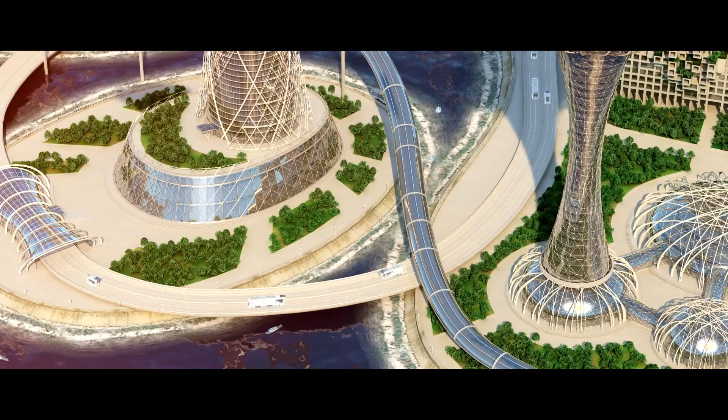To do big things, to do good things, to have a vision. This always drives me in my life. With the LEA technology, we now can contribute to a sustainable global ecosystem as well as to an enhanced telecommunication via space.

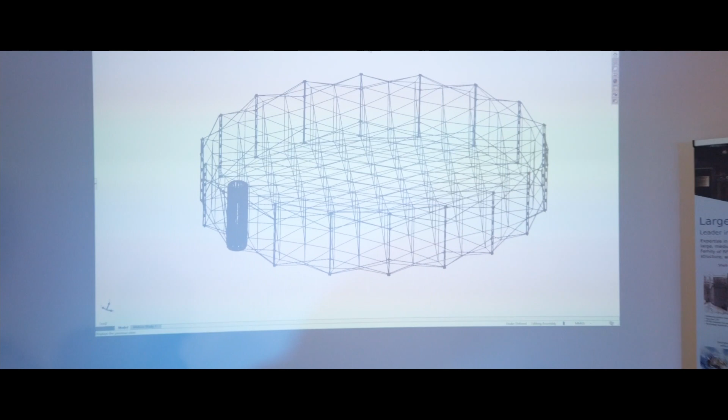Big things can only be achieved when you can count on a team which follows you, which believes in the goals, not only at your own company, but also at the partners, at the subcontractors, all the way long, and even during the Corona restrictions.

LEA is another proof that the ESA programs and the programs of the European Commission can create so many fantastic synergies. The trust of both institutions in us, in the LEA team, this boosts us now into the World League.

80 people are working for the LEA companies, for all our LDRS projects currently, at all their different positions. But all are fascinated on what they are doing. This is the story, and this makes me happy.

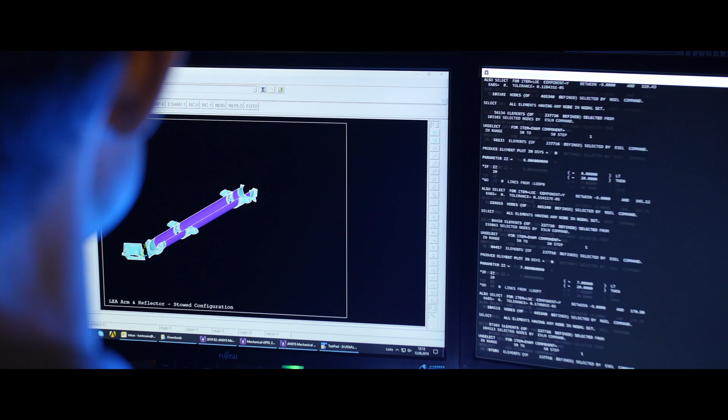The LEA X5 development marks a significant milestone in the development of a European-sourced large deployable reflector subsystem. Such a subsystem is composed not only of the arm and the reflector, but also of a number of other elements, being it the hold down and release mechanisms, being it the electronics with the harness to control the system during the deployment, or the thermal insulation to protect the hardware from the harsh environment in space, just to mention a few of them.

But all of these elements are brought together by HPS to form a qualified large deployable reflector subsystem, LEA.

I'm involved in the technology development of large deployable structures since the beginning of my professional life. In 2010 I started as a research assistant at the Technical University of Munich, and in 2016 I joined HPS, becoming the lead engineer for large deployable structures, including LEA X5. I'm really proud to be part of the team, having achieved a major milestone with qualifying the LEA X5 subsystem.

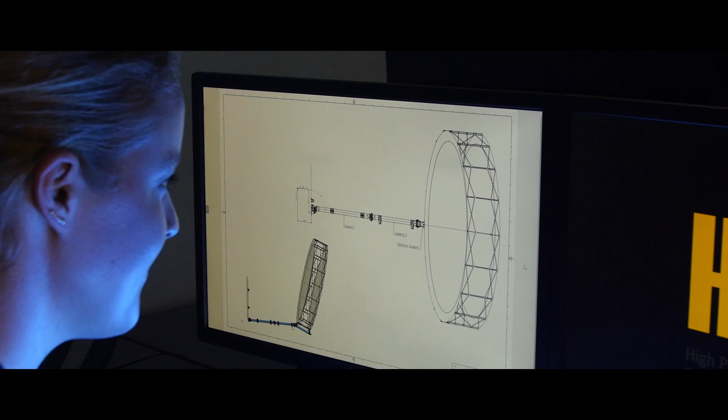Building on the LEA X5 success, I am already working as the project manager for the large deployable reflector subsystem on the follow-on project CIMR. We have a very challenging schedule, with the next milestone being successful preliminary design review already next summer.

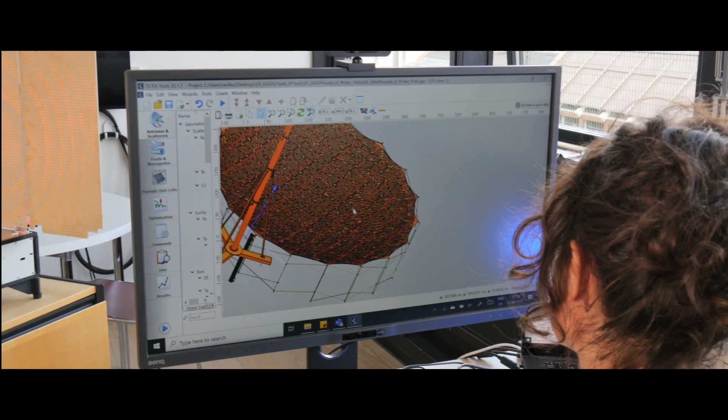TICRA has 50 years of experience in modeling reflector antennas, and our software GRASP is used by all players in the world doing large deployable reflectors. So for us it was a must, but also a great honor to be part of the LEA project and give our expertise to such an important development.

So it was our responsibility in the end to tell if the LEA antenna performed as expected. So it was a huge responsibility. I have passion for space and I'm a European citizen, so for me, working with an antenna that could be launched in space has been a dream.

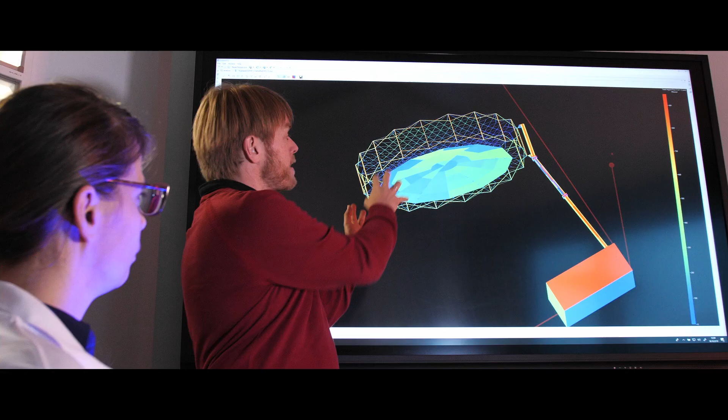After more than 20 years of extremely reliable software developments for space debris simulations and onboard software developments, ETAMAX now proudly contributes to the safety and reliability of LEA in space.

RUAG is a reliable and dependable supplier of deployment systems, and we as a company stand for 100% mission success. With the LEA project, the technical and programmatic foundations were laid.

Examples are the way of working, the development of the deployment subsystems or materials and processes. So now we have all the solutions and concepts ready to turn this heritage into flight hardware very quickly and efficiently.

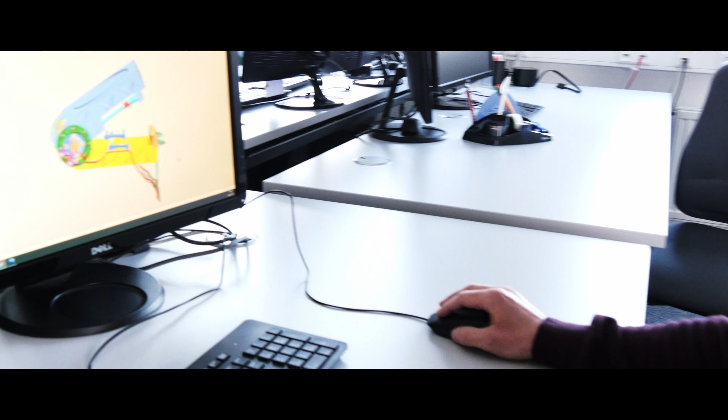LEA started with an idea, and right now we're developing the real flight hardware, and it's quite exciting for me to be part of this complete development cycle and to be part of this straightforward team.

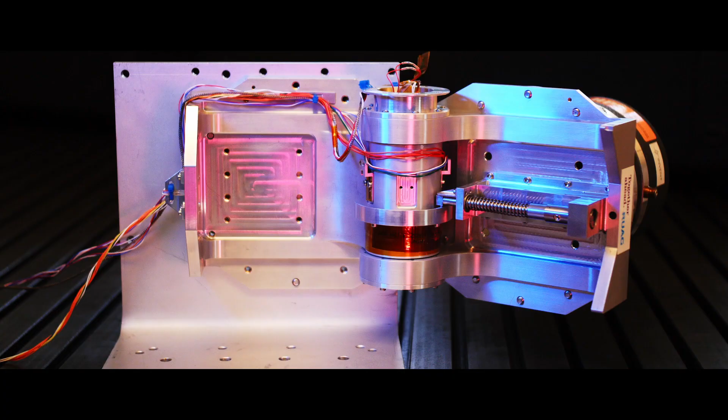On the other hand, we're part of the Sentinel program. At the end of the day, our hinge has to deploy a 60 kilogram mass at the end of an 8-meter arm. So we are building a system which helps us to better understand what's going on Earth, so to understand climate change.

This project opens up completely new business opportunities, not only for the European space industry, but also for our company, von Hörner & Sulger. It's a huge step for Europeans' technological non-dependence.

As successfully shown over the last 50 years of our company, von Hörner & Sulger, we use our highly competent and creative team to develop the best solution. The overarching collaboration of several SMEs, bundling their profound expertise, is extraordinary and unique, enabling a new dimension of creativity.

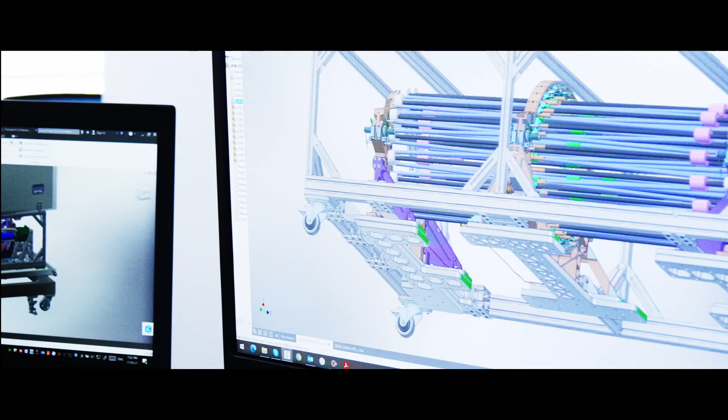In all HPS Romania activities, we have collaborations with other Romanian entities, companies and institutes, and we are ensuring them access to the European space market. And I have to say that this is an opportunity for all professionals here in Romania, because we have many highly qualified people able to deliver great quality products at competitive prices.

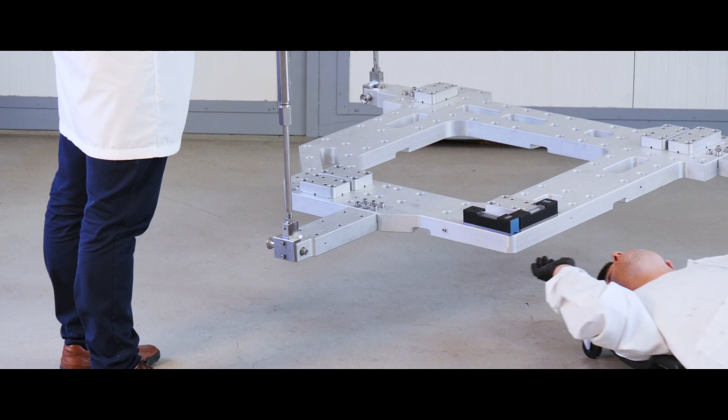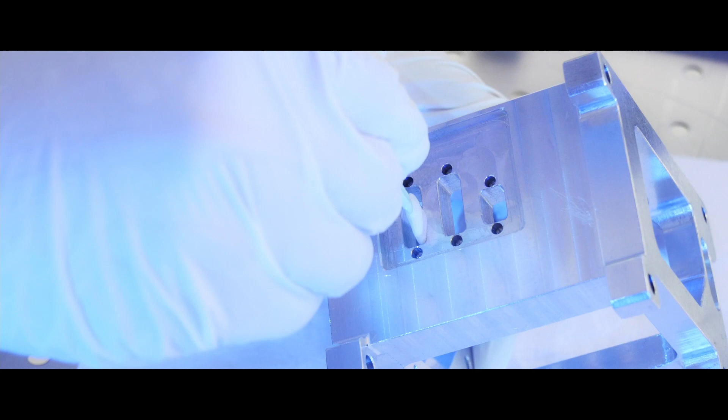HPS Romania became an important supplier of high precision MGSE assemblies and metallic parts, and managed to provide fully qualified products for various important missions.

And to sum up, we are enthusiastically looking forward to the future and to see our contribution on board future space missions.

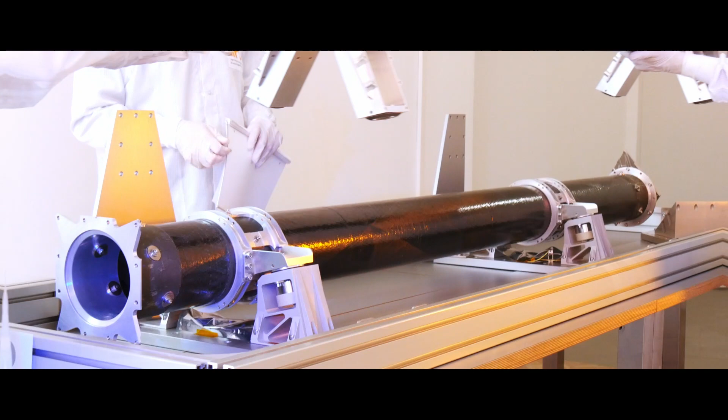Unique from my point of view was the multidisciplinary character of the LEA project. It was the first time I saw so many different specialists—mechanical, thermal, electrical and RF engineers—teaming up and working together, synchronizing and guiding their work brought us where we are now.

Deployment accuracy, repeatability, RF performance, high structural stiffness while keeping the mass low were the major challenges that we had to approach.

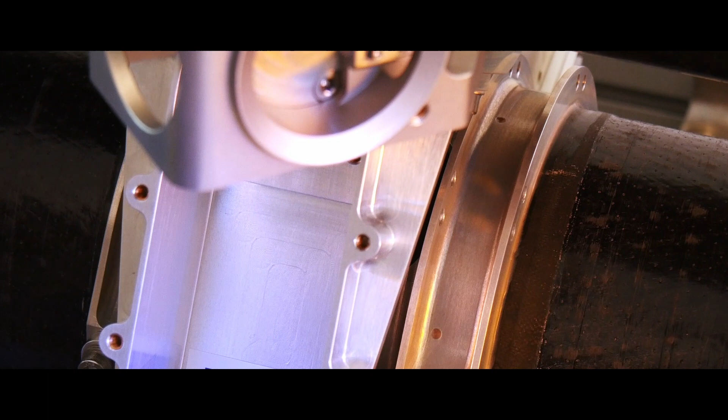For a high technology space project, it is of utmost importance to have a stringent product and quality assurance process set up and implemented. These processes need to follow the highest standards as defined by the ECSS and are applied by the European Space Agency for all their space projects.

Since INEGI has been committed to European space business for more than 15 years, it represents now more than 10% of our turnover and is an area we define as a key strategic development area for INEGI, also for the country. So it's important for Portugal to be more present in the space industry. Within this strong and committed team, one special word for HPS Germany, that we've been working with since 2007, so it's been a long-term partnership and it's been quite profitable for both organizations.

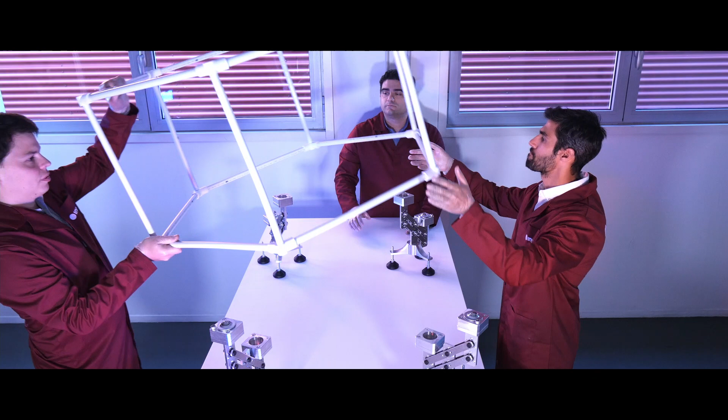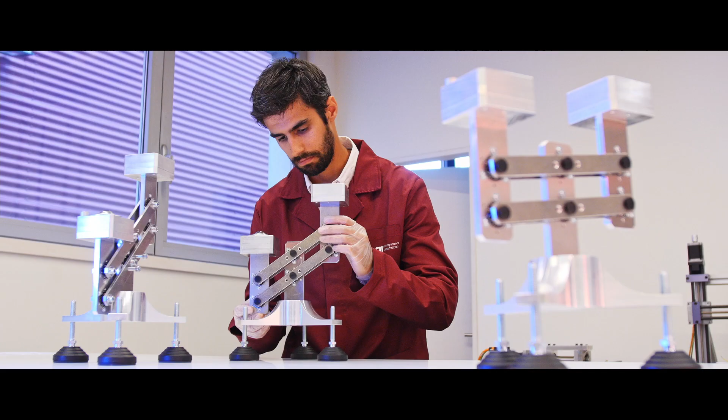My personal motivation to be part of this project is that it is a life opportunity to be part of European space history, and I really feel honored and lucky that I am part of such a great team.

Large antenna technology is really important. Our world is growing, and with this growth, it is critical that we start monitoring more closely how we are impacting the negative outcomes of this growth. We really need to observe our world.

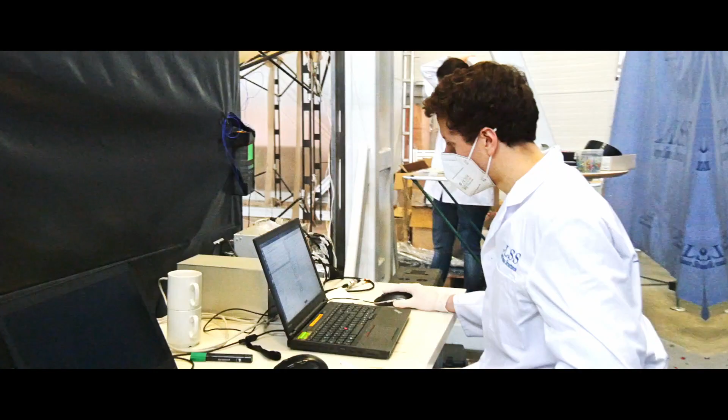Time framing during Corona restrictions was really not so easy, but we still managed to go with home offices mixed up with the office work, with the MAIT hall and workshop work, so that at the end it worked.

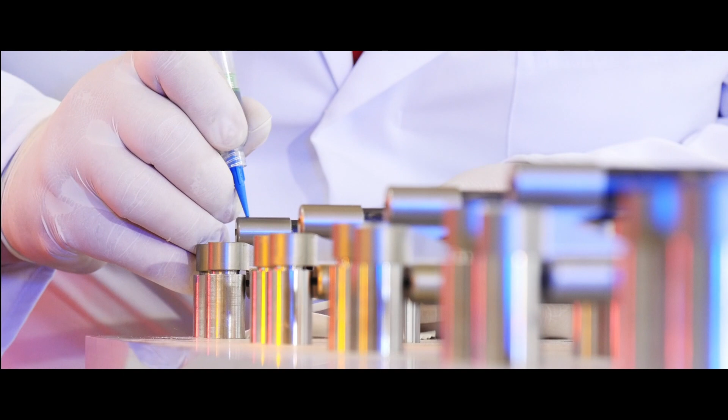Whenever we are facing any difficulties or unexpected issues during these activities I'm more involved in, which are manufacturing, assembly, integration and testing, I try to remind them that this is the first time Europe is doing and performing a project like this. We can do it always with a smile and working together.

The amount of parts we are talking about in our structure is very high. We are talking about a range of several thousands of small parts, and this includes very small parts up to larger parts, and all of them contribute to the accuracy of the reflector.

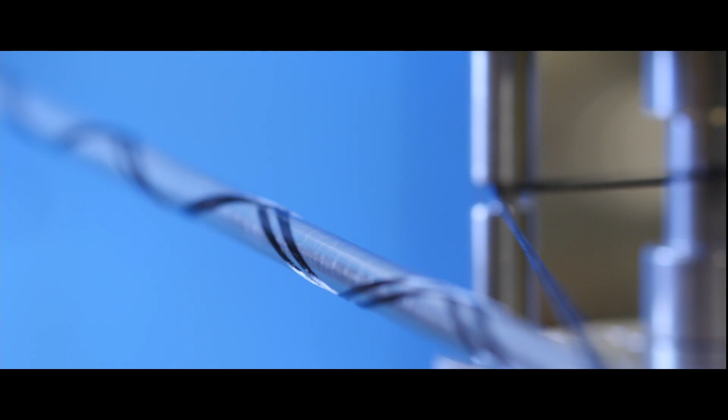FHP supports this development in order to ensure independence of key technologies and capabilities of European industry in a worldwide competitive market. And with this team, we will have the first step of getting the autonomy of these critical technologies.

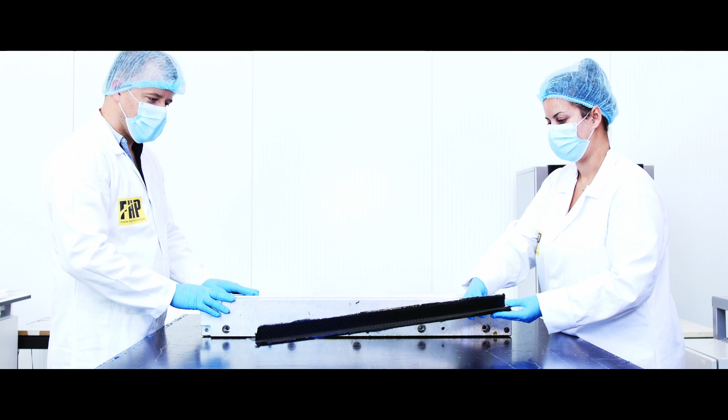My personal motivation is actually my personal contribution to the monitoring of our planet Earth. And I'm sure this project will demonstrate the value of the European space industry.

As someone said, progress is impossible without a change. If people cannot change their minds, they will not be able to change anything. And I believe this project, with an innovative approach, will be a unique opportunity and for sure will be part of our legacy for future generations.

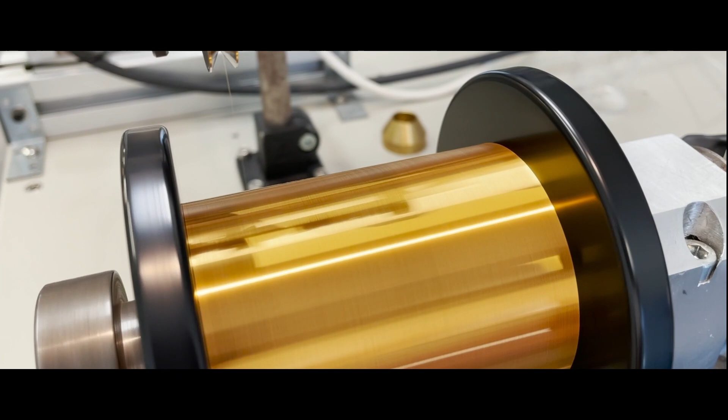The development, and especially the manufacturing, of high flexible meshes for antenna applications is a very complex and demanding task. It is made of a very special technical textile, the so-called knitted mesh. This is made of a gold-plated wire that is thinner than a human hair.

The gold plating enables a highly electroconductive surface, while the mesh has an outstanding foldability which is needed to successfully deploy once in orbit.

To face this challenge, the idea behind it was to combine the RF and space experience of HPS with the industrial knitting competence of iProtex into one joint venture called HPTEX.

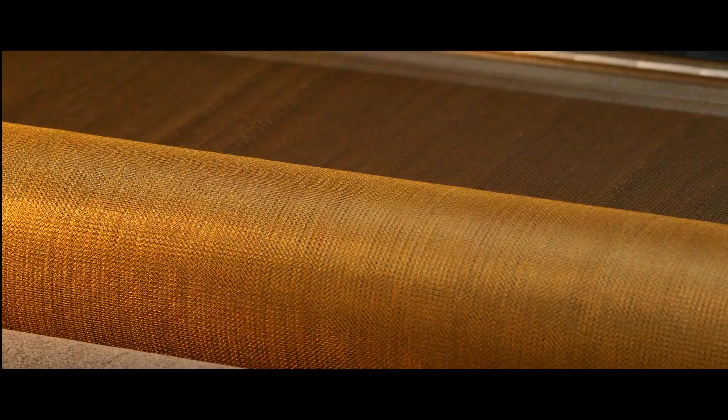Upper Franconia is a region in Bavaria that's world famous for its textile heritage. At iProtex in Münchberg, we rely on the textile know-how in the region.

With our joint venture HPTEX, we now can bring our extensive heritage of high-tech fabrics into the domain of space technology. In the last years, we have assembled knitting machines, developed special parts and tested new, innovative knitting movements.

It's great to see how thousands of gold-plated wires will combine to create a mesh with a length of over 50 meters.

And the requirements are very demanding. We are talking here about accuracy ranges of several tens of micrometers, which are extremely demanding to achieve.

And of course now it became kind of part of me because I have to follow this from the concept up to the end. We're doing something that's incredibly difficult, that no one did in Europe, and we're trying to push the technology to a point where no one ever did it. Joining all this expertise all over Europe gives really a strong feeling that we will be successful all together.

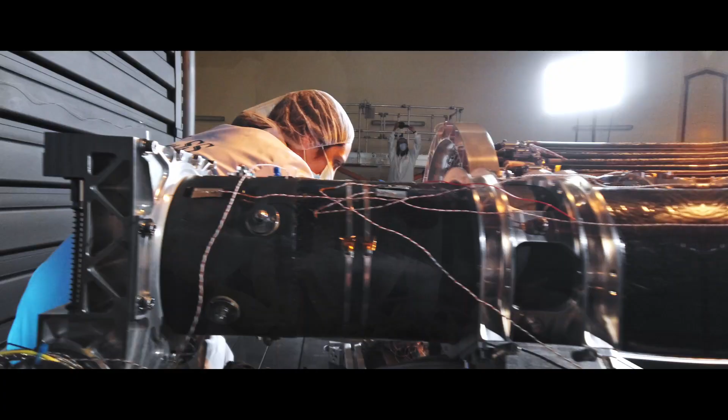I'm really confident on the market success of the LDRS design because the LEA team in charge of that design is composed of 15 companies from 7 different countries, and all together cover all the areas of expertise needed from design to test. So, from my point of view, I think all companies involved in this program are really enthusiastic and the final result will be really fantastic.

Also, we have done the final test related to the final unit, the protoflight unit. I'm trying to get at least the TRL 8.